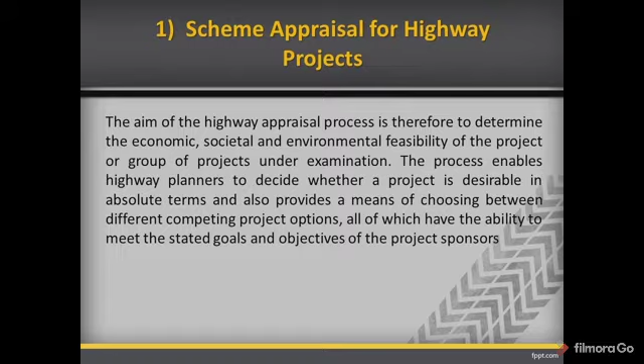Some of the goods provided by the public sector such as defense, schools, and roads are not directly charged for. Consequently, financial criteria are of little help in ensuring that money is spent in a consistent and efficient manner and that benefits to society from investment are maximized. Cost-benefit analysis is a technique which has been developed to assist in the appraisal of the non-marketable output of public sector investments.

COBA, a Department of Transport-sponsored computer program, estimates the effect of highway improvements in terms of time, vehicle operating, and accident costs on the users of the road system. These cost changes are compared with the construction and maintenance costs over the appraisal period.

Traffic flows with and without the scheme being appraised are input together with a detailed geometric description of the network links and junctions. The individual link and junction user costs are summed to yield the total cost over the network.

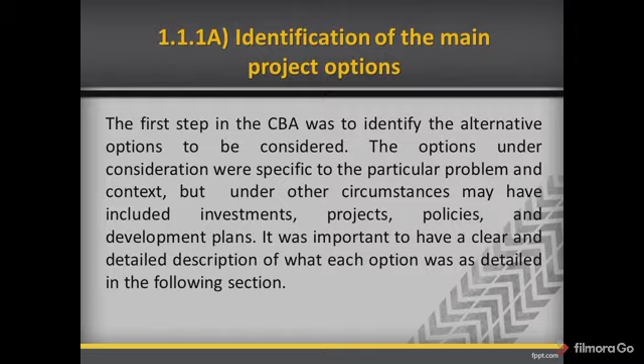The options under consideration were specific to the particular problem and context, but under other circumstances may have included investments, projects, policies, and development plans. It was important to have a clear and detailed description of what each option was, as detailed in the following section. Next is the identification of all relevant costs and benefits.

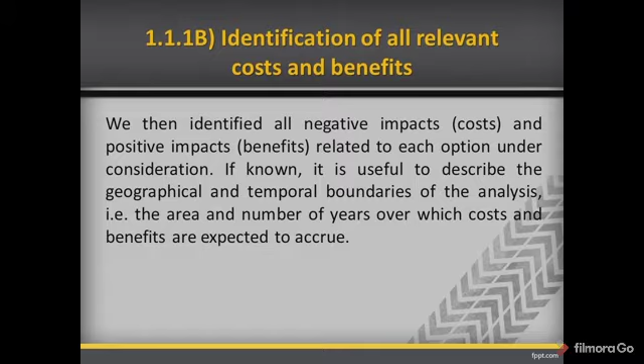We then identified all negative impacts, which are the costs, and positive impacts, which are the benefits, related to each option under consideration. If known, it is useful to describe the geographical and temporal boundaries of the analysis, for example the area and number of years over which costs and benefits are expected to accrue.

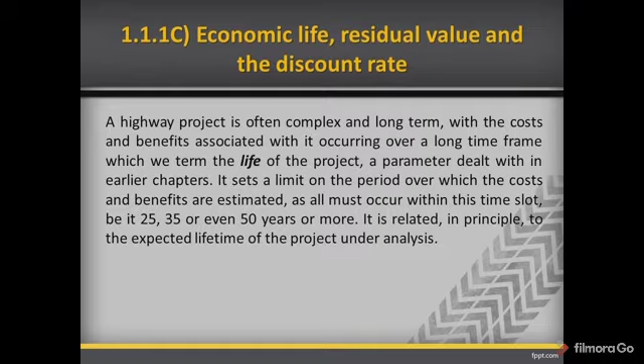The next step is the economic life, residual value, and the discount rate. A highway project is often complex and long-term, with the costs and benefits associated with it occurring over a long time frame, which we term the life of the project, a parameter dealt with in earlier chapters. It sets a limit on the period over which the costs and benefits are estimated, as all must occur within this time slot, be it 25, 35, or even 50 years or more. It is related in principle to the expected lifetime of the project under analysis.

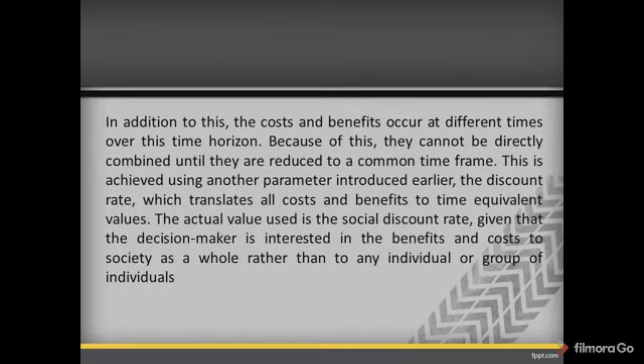In addition to this, the costs and benefits occur at different times over the time horizon. Because of this, they cannot be directly combined until they are reduced to a common time frame. This is achieved using another parameter introduced earlier, the discount rate, which translates all costs and benefits to time-equivalent values. The actual value used is the social discount rate, given that the decision maker is interested in the benefits and costs to society as a whole rather than to any individual or group of individuals.

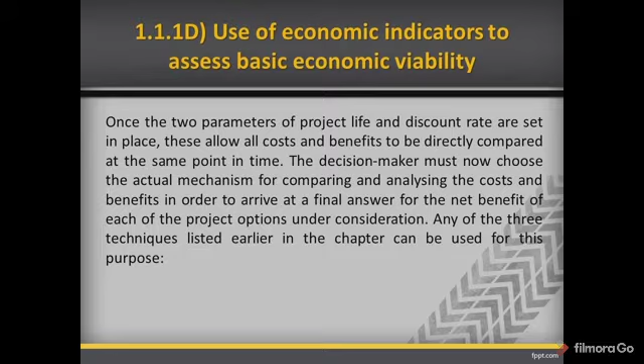So the next topic is the use of economic indicators to assess basic economic viability. Once the two parameters of the project's life and discount rate are set in place, this allows all costs and benefits to be directly compared at the same point in time. The decision maker must now choose the actual mechanism for comparing and analyzing the costs and benefits in order to arrive at a final answer for the net benefit of each of the project options under consideration. Any of three techniques listed earlier in the chapter can be used for this purpose.

So, those three methods are the net present value or NPV, another one is internal rate of return, which is IRR, and last is the benefit-cost ratio or B over C. All these are based on the discounted cash flow technique of discounting all future costs and benefits to a common year.

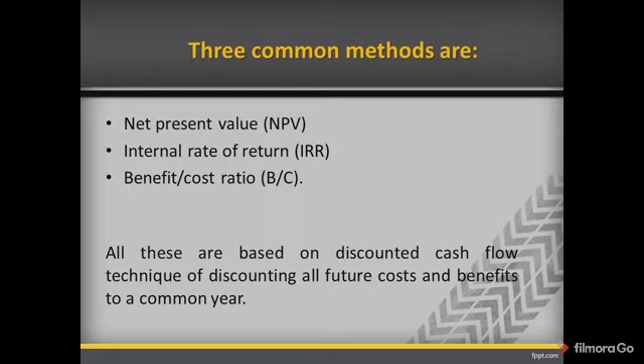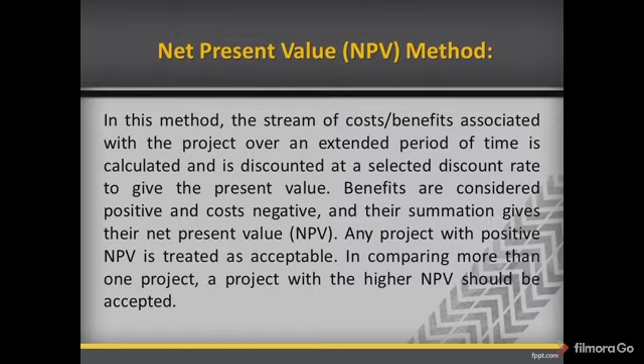In this method, the stream of cost benefit associated with the project over an extended period of time is calculated and is discounted at a selected discount rate to give the present value. Benefits are considered positive and cost is negative, and their summation gives the net present value. Any project with positive NPV is treated as acceptable. In comparing more than one project, a project with a higher NPV should be accepted.

So the next is the benefit cost ratio method. There are a number of variations on this method, but a simple procedure is to discount all costs and benefits to their present worth and calculate the ratio of the benefits to cost. Benefits are positive flows while costs are negative flows. Thus, the savings in transport costs are considered as benefits. If the benefit cost ratio is more than 1, the project is worth undertaking.

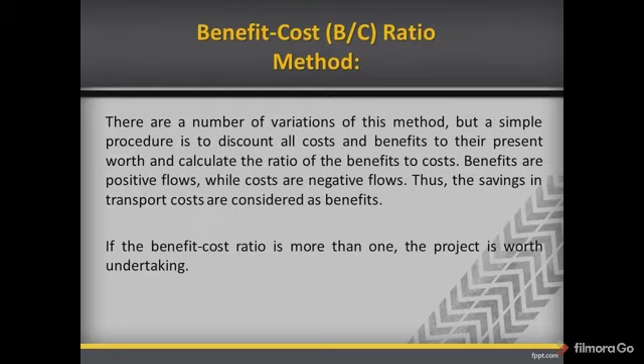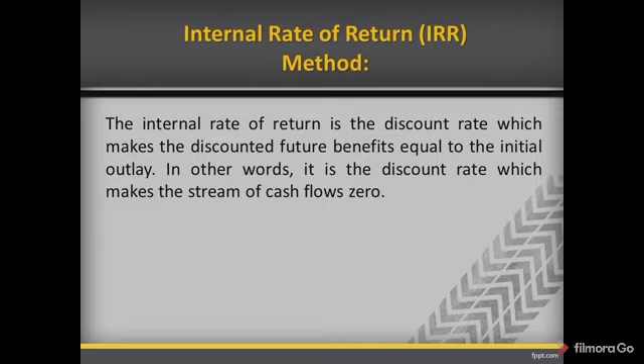The last method is the internal rate of return. The internal rate of return is the discount rate which makes the discounted future benefits equal to the initial outlay. In other words, it is the discount rate which makes the stream of cash flow zero.

Next step is the advantages and disadvantages of cost-benefit analysis. Advantages: the use of a common unit of measurement, money, facilitates comparisons between alternative highway proposals and hence aids the decision-making process. Next, a cost-benefit analysis is in part a tool geared toward helping you to make rational rather than emotional decisions.

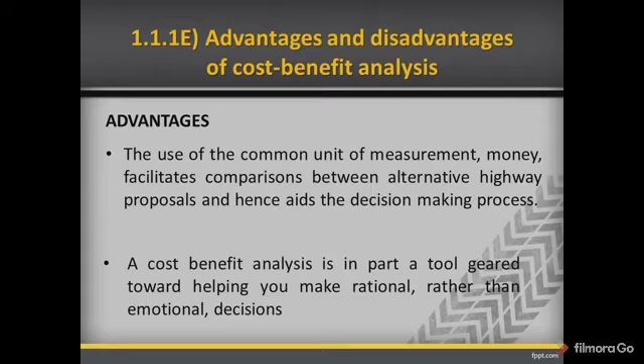Disadvantages: the method is more suitable for comparing highway proposals designed to meet a given transport objective, rather than evaluating the absolute desirability of one project in isolation. Next, the primary basis for constructing a highway project may be a societal or environmental rather than an economic one.

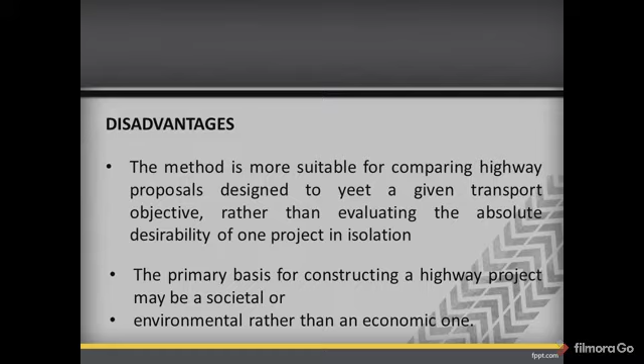Last step is the payback analysis. Payback analysis is a mathematical methodology to determine the payback period for an investment. The payback period is how long it will take to pay off the investment with the cash flow derived from the asset or project. In colloquial terms, to calculate the break-even point, the payback period is usually measured in fractions of years.

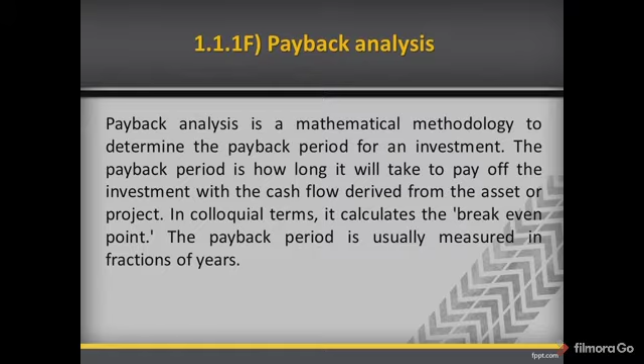Payback analysis can provide important information for decision making. It provides a means to manage risk. You can use payback analysis to determine whether an asset or project will pay for itself in an acceptable period of time. Shorter payback periods are usually viewed as less risky.

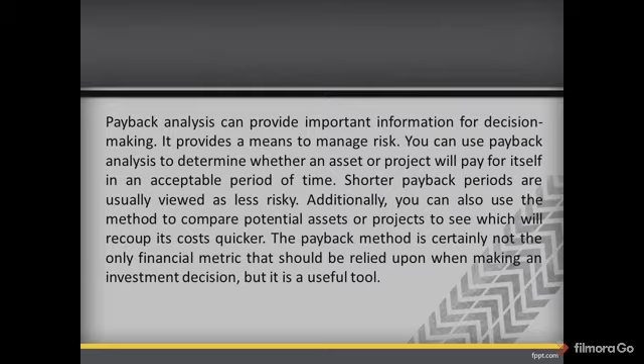Additionally, you can also use the method to compare potential assets or projects to see which will recoup its costs quicker. The payback method is certainly not the only financial metric that should be relied upon when making an investment decision, but it is a useful tool.

The following formula enables the payback period to be arrived at. Payback period is equal to CO plus NAS, where CO is the initial construction cost of the highway project, while NAS is the net annual savings.

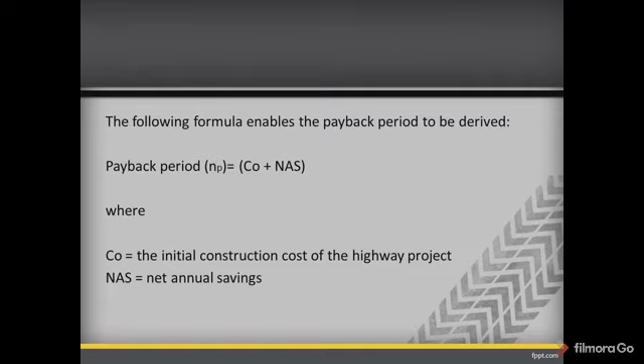Roads attaches great importance to environmental issues. Environmental assessment is a method and process by which information about environmental effects is collected, assessed, and used to inform decision making.

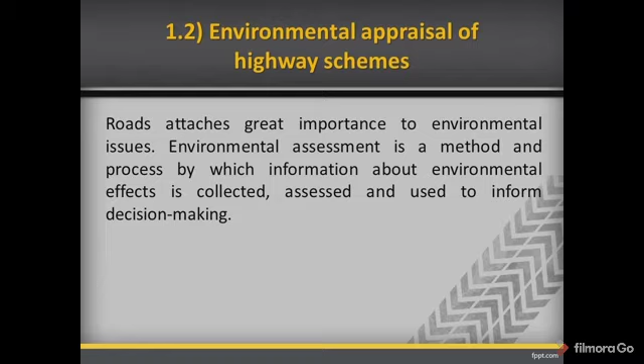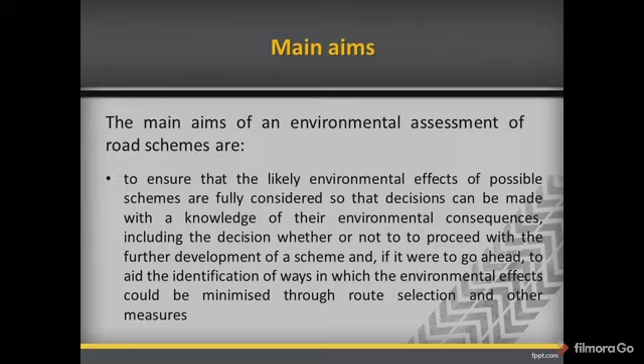The main aims of an environmental assessment of road schemes are to ensure that the likely environmental effects of a possible scheme are fully considered so that decisions can be made with a knowledge of their environmental consequences, including the decision whether or not to proceed with the further development of the scheme, and if it were to go ahead, to aid the identification of ways in which the environmental effects could be minimized through route selection and other measures.

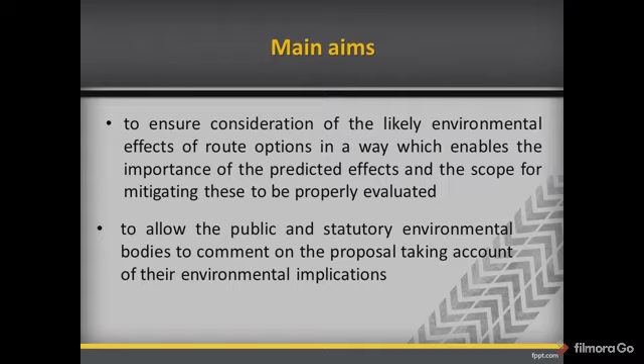Next is to ensure consideration of the likely environmental effects of route options in a way which enables the importance of the predicted effects and the scope for mitigating them to be properly evaluated. Last one is to allow the public and statutory environmental bodies to comment on the proposal taking account of their environmental implications.

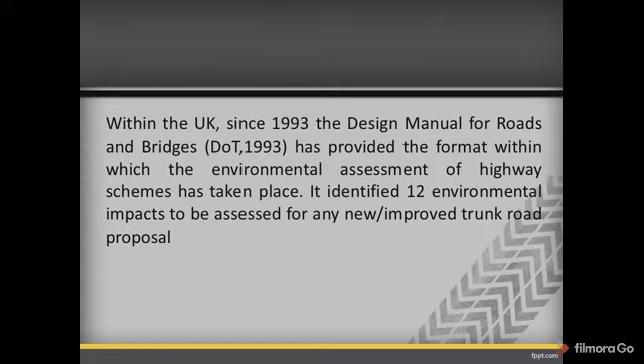Within the UK, since 1993, the Design Manual for Roads and Bridges has provided the format within which the environmental assessment of highway schemes has taken place. It identified 12 environmental impacts to be assessed for any new or improved trunk road proposal.

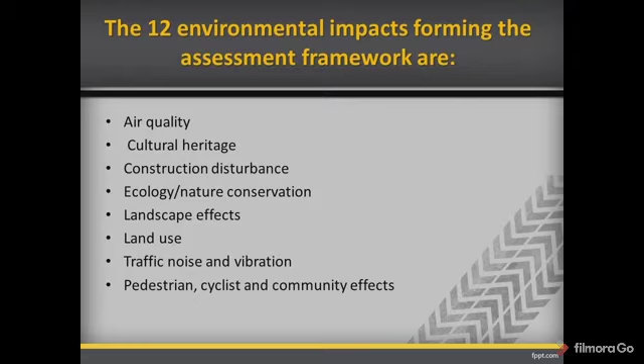The 12 environmental impacts forming the assessment frameworks are: first is the air quality, cultural heritage, construction disturbance, ecology or nature conservation, landscape effects, land use, traffic noise and vibration, pedestrian, cyclist and community effects, vehicle travelers, water quality and drainage, geology and soils, and lastly is the policies and plans.

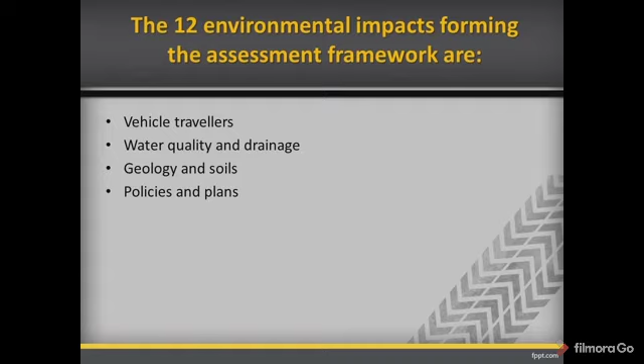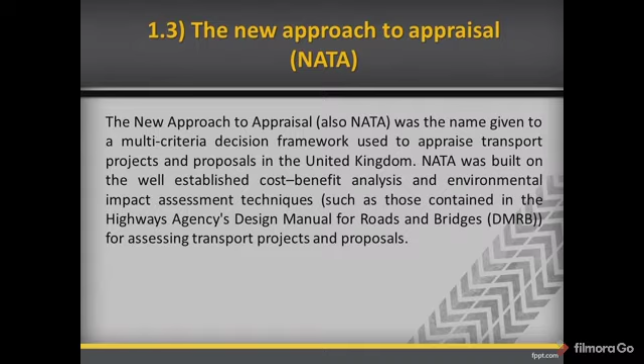Last method ay ang the new approach to appraisal na tinatawag na NATA. The new approach to appraisal was the name given to a multi-criteria decision framework used to appraise transport projects and proposals in the United Kingdom. NATA was built on the well-established cost-benefit analysis and environmental impact assessment techniques such as those contained in the Highways Agency Design Manual for Roads and Bridges for assessing transport projects and proposals.

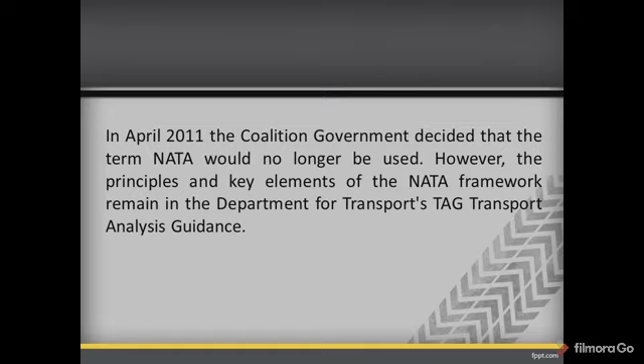In April 2011, the coalition government decided that the term NATA would no longer be used. However, the principles and key elements of the NATA framework remain in the Department for Transport (TAG, Transport Analysis Guidance). The methods for assessing the value for money of transport projects have been at the forefront of project appraisal practice in the UK for many years.

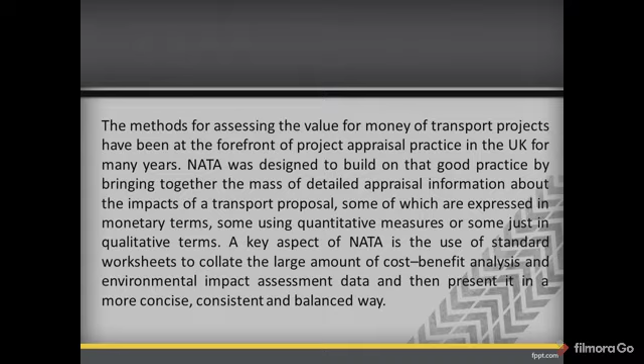NATA was designed to build on that good practice by bringing together the mass of detailed appraisal information about the impacts of a transport proposal, some of which are expressed in monetary terms, some using quantitative measures, or just in qualitative terms. A key aspect of NATA is the use of standard worksheets to collate the large amount of cost-benefit analysis and environmental impact assessment data and then present it in a more concise, consistent, and balanced way.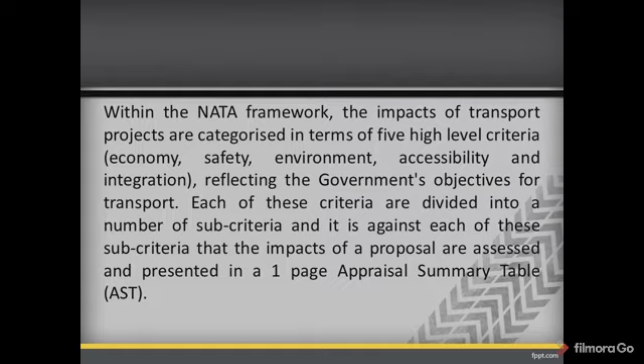Within the NATA framework, the impacts of transport projects are categorized in terms of five high-level criteria. Ito ay ang economy, safety, environment, accessibility, and integration, reflecting the government's objectives for transport. Each of these criteria is divided into a number of sub-criteria, and it is against each of these sub-criteria that the impacts of a proposal are assessed and presented in a one-page appraisal summary table. The division of the five criteria is shown below.

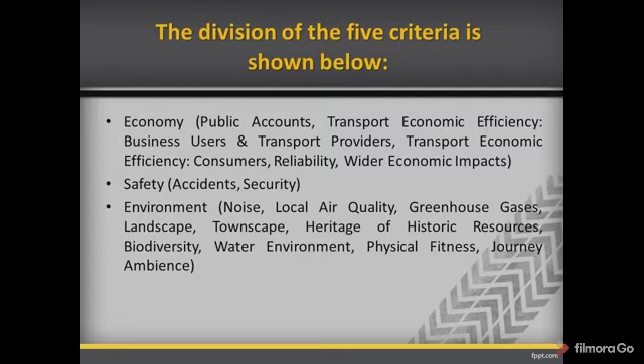First is the economy. Under ng economy, nandito ang public accounts, transport economic efficiency: business users and transport providers, transport economic efficiency: consumers, reliability, wider economic impacts. Next is the safety. Under nito ang accidents and security. Next is the environment. Under nito ang noise, local air quality, greenhouse gases, townscape, heritage of historic resources, biodiversity, water environment, physical fitness, journey ambience.

Next is the accessibility. Under nito ang option values, severance, access to the transport system. And lastly is the integration. Under nito ang transport interchange, land use policy, and other government policies.

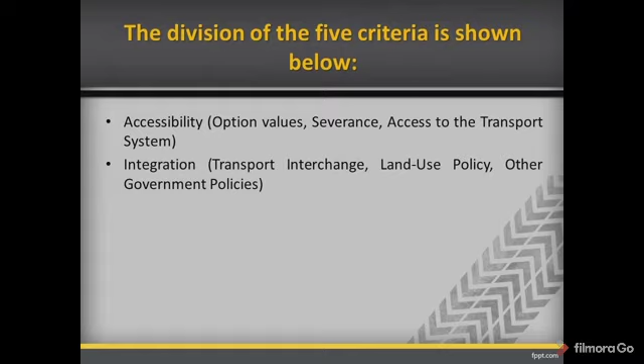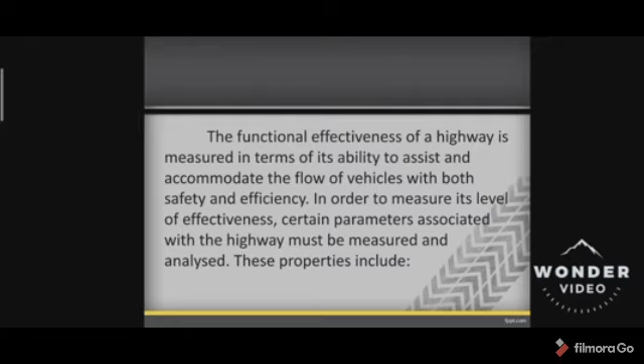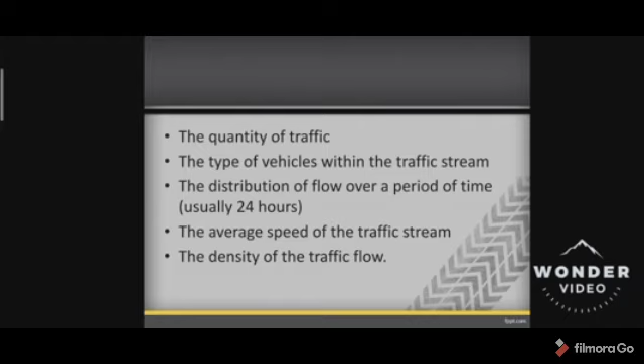Good day everyone. Here is the continuation of our topic, which is the basic elements of highway traffic analysis. The functional effectiveness of a highway is measured in terms of its ability to assist and accommodate the flow of vehicles with both safety and efficiency. In order to measure its level of effectiveness, certain parameters must be measured and analyzed, and these properties include the quantity of traffic, the types of vehicles within the traffic stream, the distribution of flow over a period of time, which is usually 24 hours, the average speed of the traffic stream, and the density of the traffic flow.

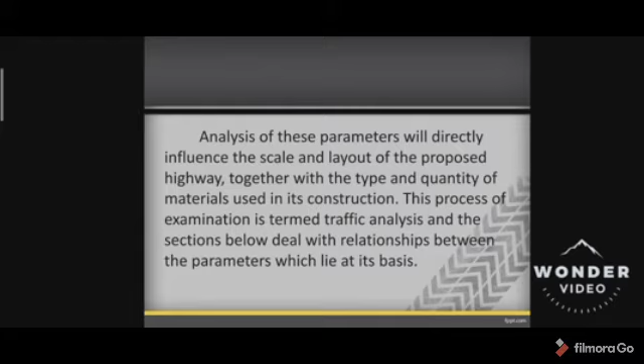Analysis of these parameters will directly influence the scale and layout of the proposed highway, together with the type and quantity of materials used in its construction. This process of examination is termed traffic analysis, and the sections below deal with the relationship between the parameters which lie at its basis. Speed, flow, and density of a stream of traffic.

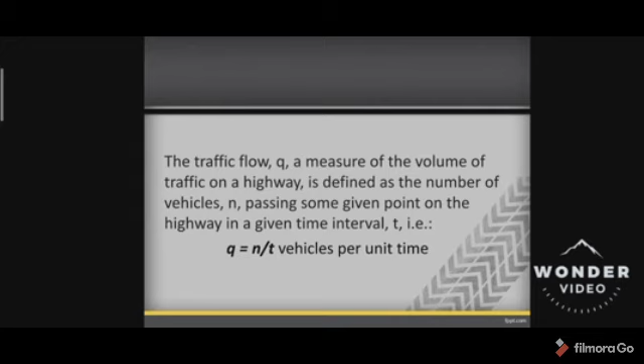The traffic flow Q, a measure of the volume of traffic on a highway, is defined as the number of vehicles N passing some given point on the highway in a given time interval T, with the formula Q equals N over T vehicles per unit time. The number of vehicles on a given section of highway can also be computed in terms of density or concentration of the traffic. K equals N over L, where K is the measure of the number of vehicles N occupying the length of roadway L.

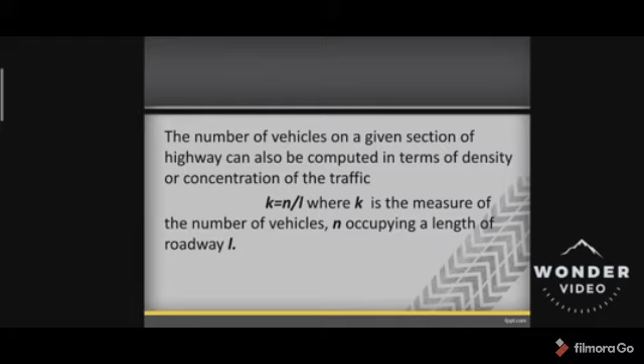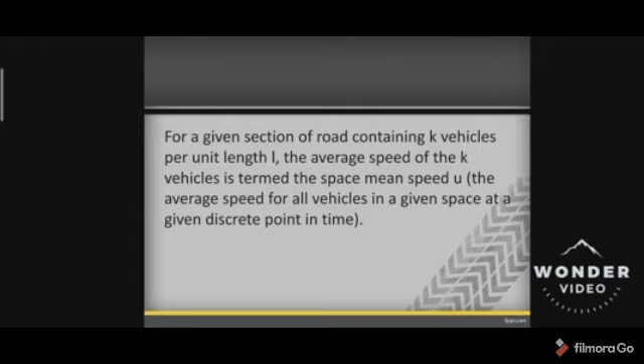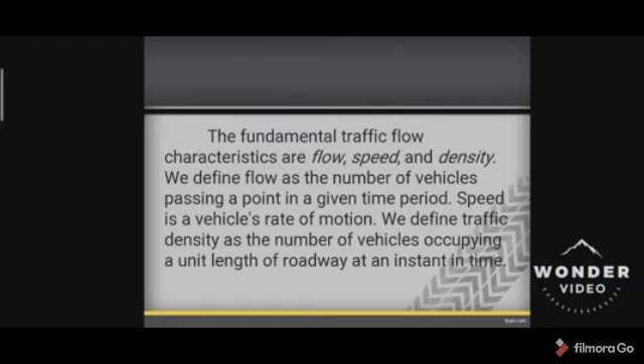The fundamental traffic flow characteristics are flow, speed, and density. We define flow as the number of vehicles passing a point in a given time period. Speed is a vehicle's rate of motion. We define traffic density as the number of vehicles occupying a unit length of roadway at an instant in time.

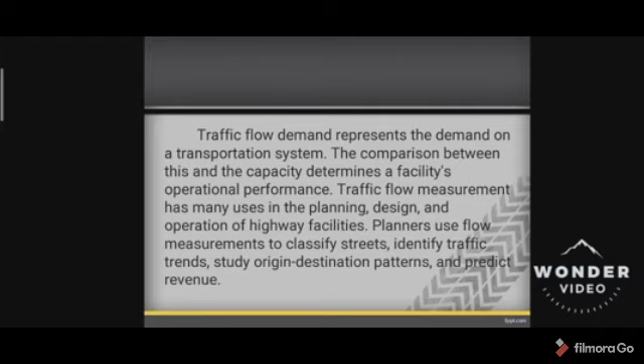Traffic flow demand represents the demand on a transportation system. The comparison between this and the capacity determines a facility's operational performance. Traffic flow measurement has many uses in the planning, design, and operation of highway facilities. Planners use flow measurements to classify streets, identify traffic trends, study origin-destination patterns, and predict revenue.

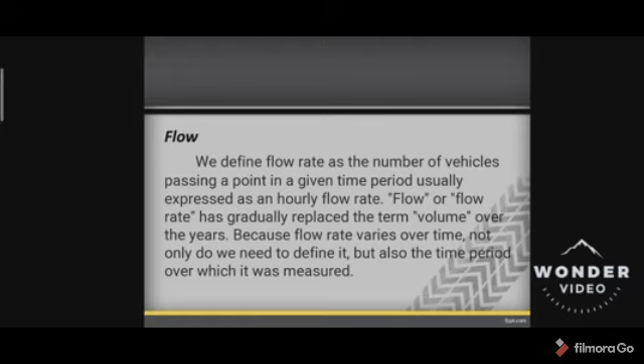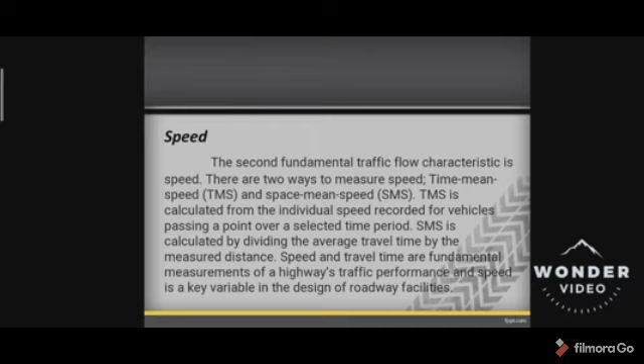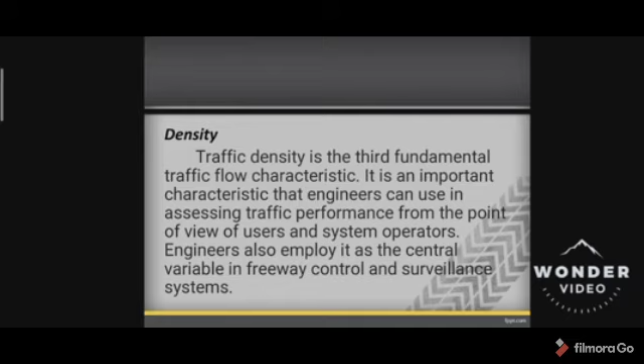Density. Traffic density is the third fundamental traffic flow characteristic. It is an important characteristic that engineers can use in assessing traffic performance from the point of view of users and system operators. Engineers also employ it as the central variable in freeway control and surveillance systems.

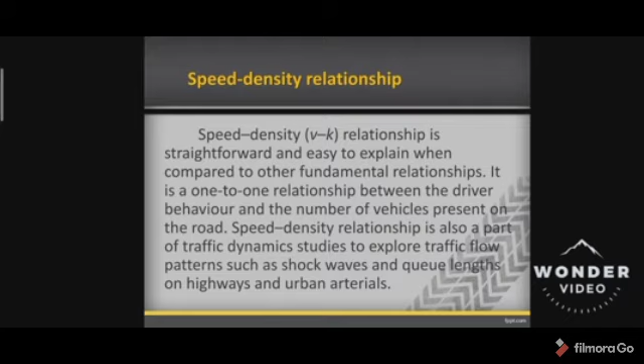Flow density relationship. The flow and density vary with time and location. The relation between the density and the corresponding flow on a given stretch of road is referred to as one of the fundamental diagrams of traffic flow. Some characteristics of an ideal flow density relationship are listed. When the density is zero, flow will also be zero since there is no vehicle on the road. Second, when the number of vehicles gradually increases, the density as well as flow increases.

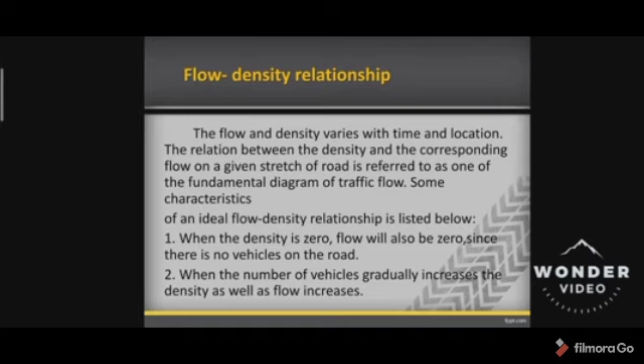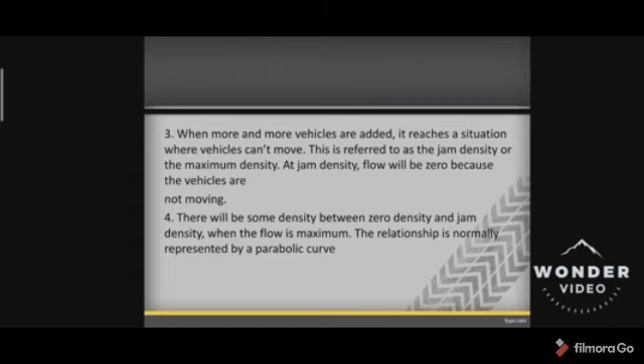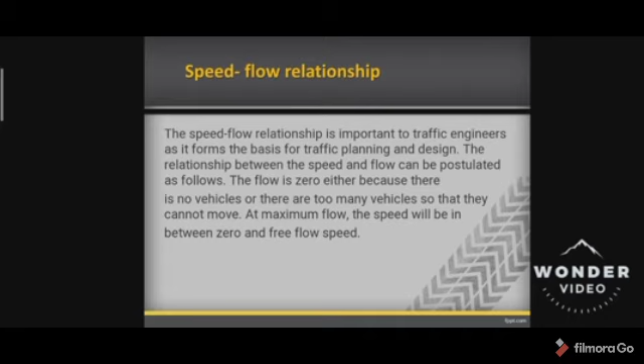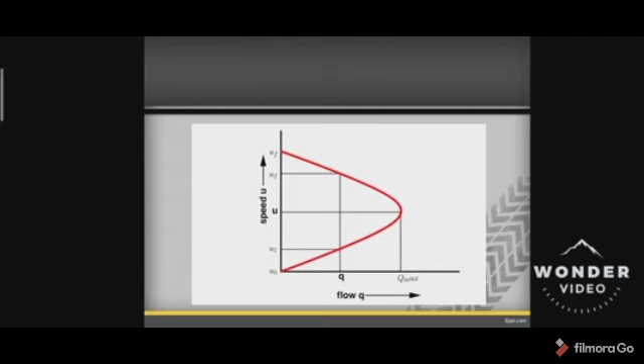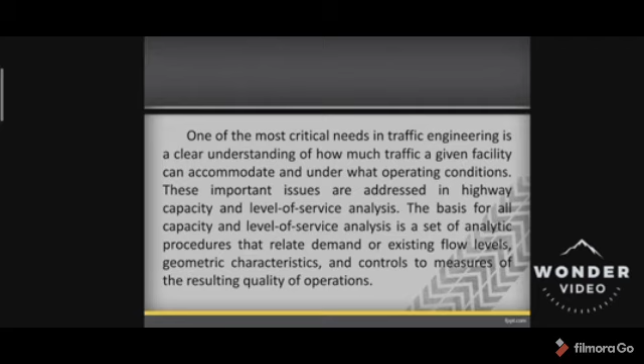Next is determining the capacity of highways in the level of service approach. One of the most critical needs in traffic engineering is a clear understanding of how much traffic a given facility can accommodate and under what operating conditions. These important issues are addressed in highway capacity and level of service analysis. The basis for all capacity and level of service analysis is a set of analytic procedures that relate demand or existing flow levels, geometric characteristics, and controls to measures of the resulting quality of operations.

Highway capacity. The capacity of a facility is defined as the maximum hourly flow rate, the maximum number of vehicles, passengers, or the like per unit time, which can be accommodated under prevailing roadway, traffic, and control conditions with a reasonable expectation of occurrence. Capacity is independent of the demand. It speaks about the physical amount of vehicles and passengers that a road can afford. It does not depend on the total number of vehicles demanding service.

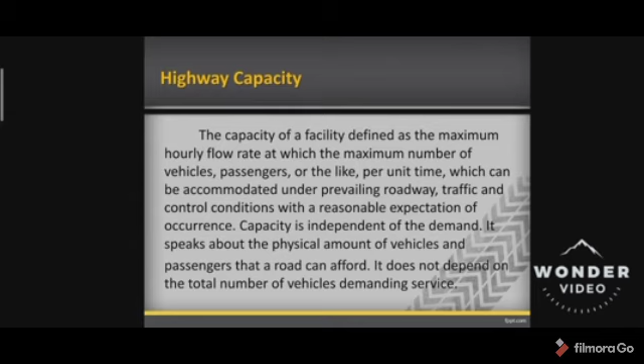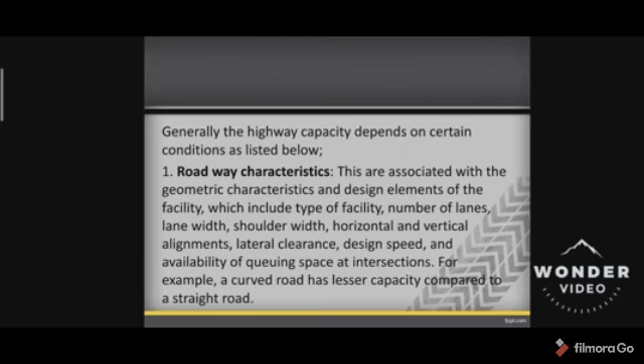Generally, the highway capacity depends on certain conditions as listed. First is the roadway characteristics. These are associated with the geometric characteristics and design elements of the facility, which include type of facility, number of lanes, lane width, shoulder width, horizontal and vertical alignments, lateral clearance, design speed, and the availability of queuing space at intersections. For example, a curved road has lesser capacity compared to a straight road.

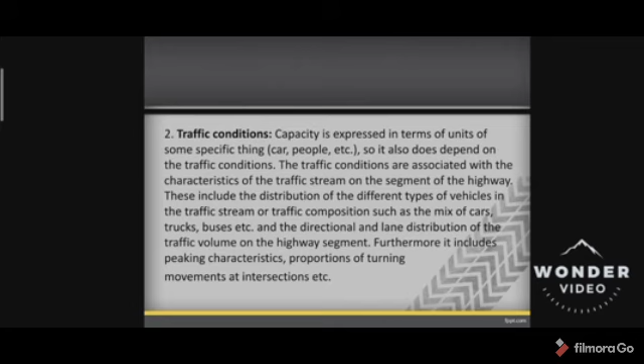Second is the traffic conditions. Capacity is expressed in terms of units of some specific thing, so it also depends on the traffic conditions. The traffic conditions are associated with the characteristics of the traffic stream on the segment of the highway. This includes the distribution of the different types of vehicles in the traffic stream, or traffic composition, such as the mix of cars, trucks, buses, etc., and the directional and lane distribution of the traffic volume of the highway segment. Furthermore, it includes peaking characteristics and proportions of turning movements at intersections.

Third, control conditions. This primarily applies to surface facilities and includes the types of traffic control devices in operation, signal phasing, allocation of green time, cycle length, and the relationship with adjacent control measures.

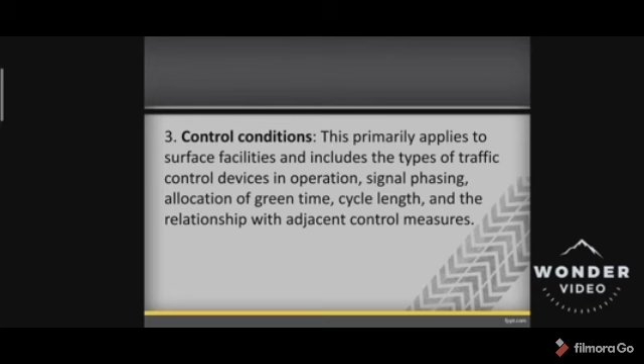Level of service. The level of service concept was introduced in the 1965 HCM as a convenient way to describe the general quality of operations on a facility with defined traffic, roadway and control conditions. Using a letter scale from A to F, a terminology for operational quality was created that has become an important tool in communicating complex issues to decision makers and the general public.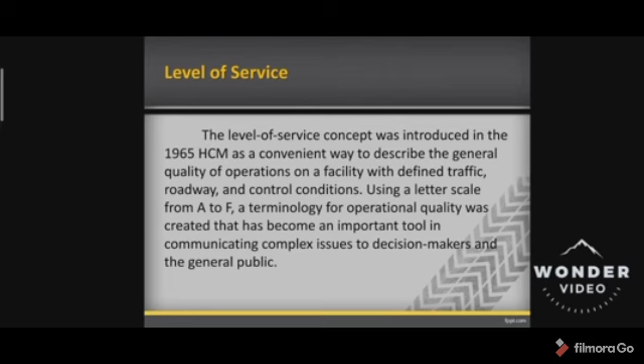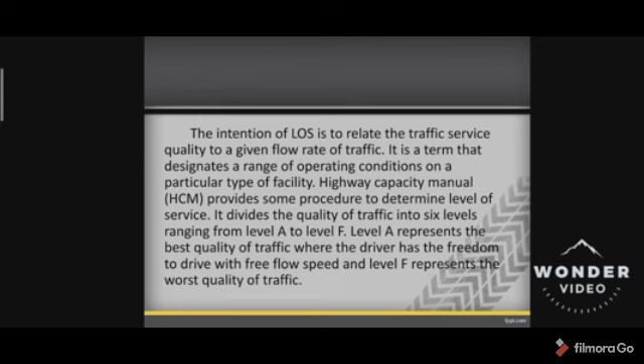The intention of LOS is to relate the traffic service quality to a given flow rate of traffic. It is a term that designates a range of operating conditions on a particular type of facility. The Highway Capacity Manual, or the HCM, provides some procedures to determine level of service. It divides the quality of traffic into 6 levels ranging from level A to level F. Level A represents the best quality of traffic, where the driver has the freedom to drive with free flow speed, and level F represents the worst quality of traffic.

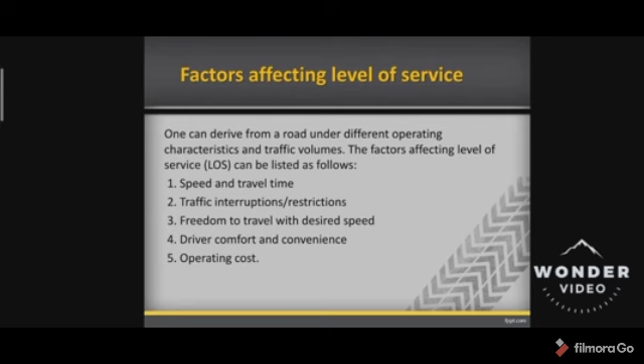What are the factors affecting level of service? One can derive these from a road under different operating characteristics and traffic volumes. The factors affecting level of service can be listed as follows. First, speed and travel time. Next is traffic interruptions and restrictions, freedom to travel with desired speed, driver comfort and convenience, and the operating cost.

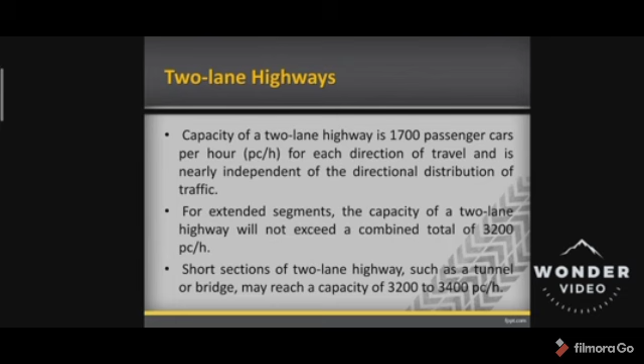In terms of two-lane highways, capacity of a two-lane highway is 1,700 passenger cars per hour for each direction of travel and is nearly independent of the directional distribution of traffic. For extended segments, the capacity of a two-lane highway will not exceed a combined total of 3,200 passenger cars per hour. Short sections of two-lane highways such as a tunnel or bridge may reach a capacity of 3,200 to 3,400 passenger cars per hour.

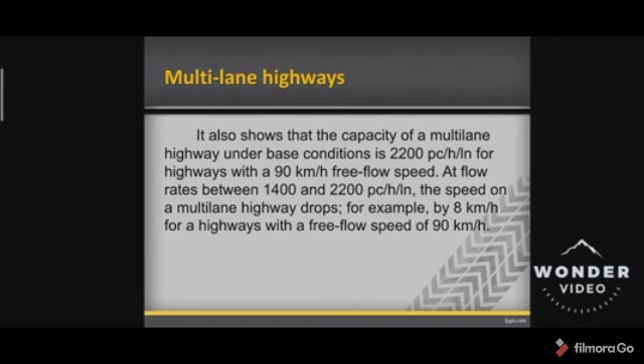And in multi-lane highways, the capacity of a multi-lane highway under base conditions is 2,200 pc/h/ln for highways with a 90 km per hour free flow speed. At flow rates between 1,400 and 2,200, the speed on a multi-lane highway drops, for example, by 8 km per hour for highways with a free-flow speed of 90 km per hour.

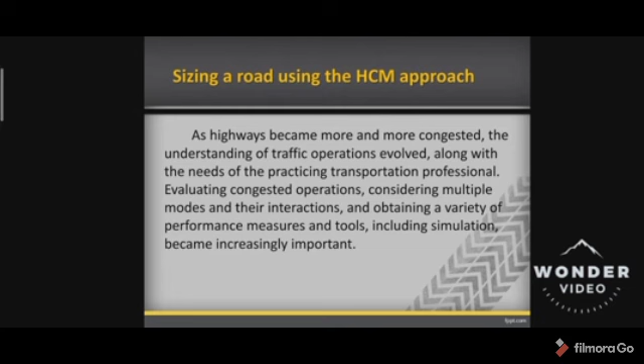Sizing a road using the HCM approach. As highways become more and more congested, the understanding of traffic operations evolves along with the needs of the practicing transportation professional. Evaluating congested operations, considering multiple modes and their interactions, and obtaining a variety of performance measures and tools, including simulation, become increasingly important.

HCM resources can be applied to estimate queue length, travel time, reliability, and other operational, design and planning analyses. HCM still provides methods for the more traditional analysis of uninterrupted facilities such as freeways, multi-lane highways, and two-lane highways, and for interrupted facilities such as urban streets, interchanges, signalized intersections, unsignalized intersections, and roundabouts.

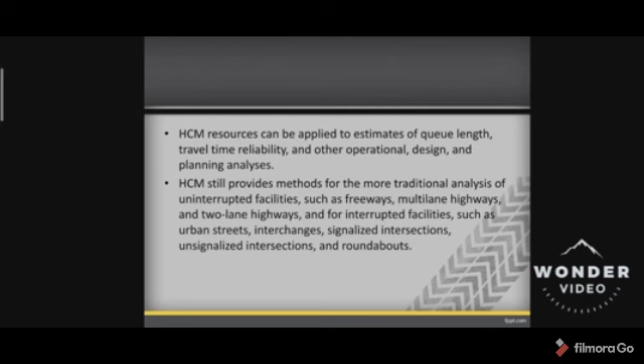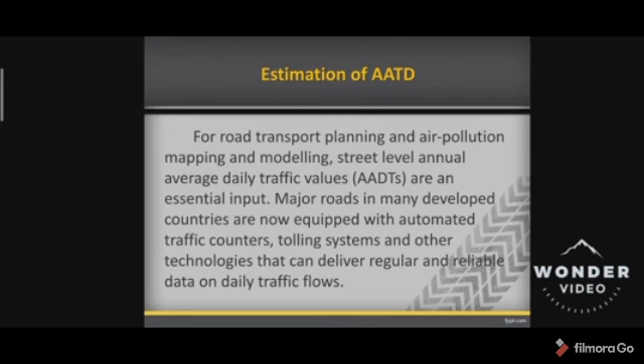Estimation of AADT, or the annual average daily traffic values. For road transport planning and air pollution mapping and modeling at street level, annual average daily traffic values are an essential input. Major roads in many developed countries are now equipped with automated traffic counters, tolling systems, and other technologies that can deliver regular and reliable data on daily traffic flows.

And that's the end of our topic.